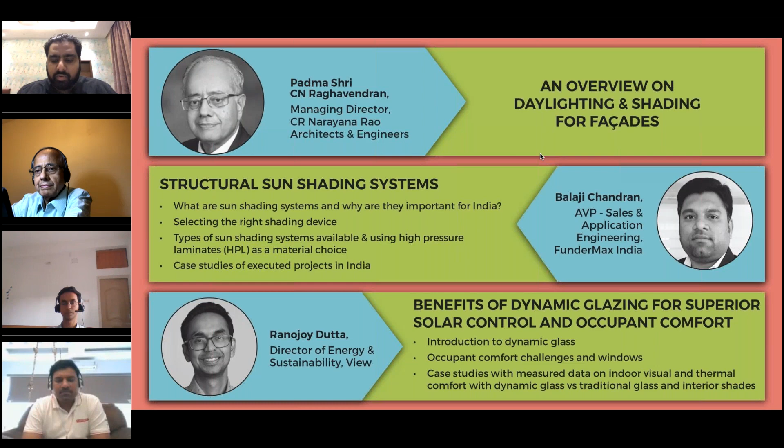Just to introduce our speakers, of course, architect C. N. Raghavendran needs no introduction, but I'll just run you through. He's a distinguished alumnus of IIT Kharagpur. He completed his architecture in 1966, and he also finished his master's degree from UC Berkeley in 1968. In 2011, he was awarded the Padma Shri by the President of India, which is one of the highest civilian honors a person can get, and we're very happy that a person from the field of architecture has won this. He has a lot of other achievements to his portfolio. They run into pages if I have to read them, but these are his broad achievements.

Next presenter is Balaji Chandran. He's the Associate Vice President at FunderMax. FunderMax is a leading manufacturer of high-pressure laminates. It's an Austrian company. So he's going to be talking about their structural sun shading systems. And then our last presenter for the day is Ranojoy Dutta. He is the Director of Energy and Sustainability at View. View is a disruptor based out of Silicon Valley in the United States. They are the manufacturer of electrochromic glass, which you can use to have dynamic glazing. So these are our presenters for today.

I will move on straight to the first presenter, which is architect C.N. Raghavendran. I will just give him the control. Just a second. So he will be presenting first. So, have you got the control? I've just given you the control.

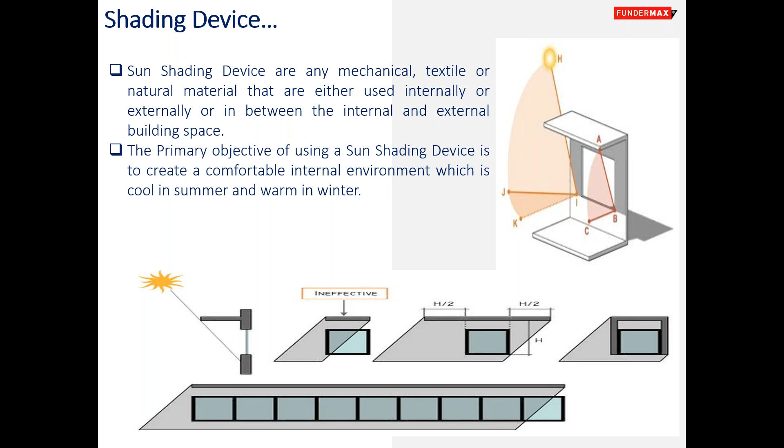Why is it so important in a country like India? I'll only take it in this context. India is not only a country which stands united in diversity, but also diverse in the various climates within its topography. As per the National Building Code, or even the Indian Green Building Council, the entire Indian topography has been split into 5 different zones.

Almost 75% of it falls under either hot and dry, warm and humid, or composite climatic zones, where the effect of solar radiation is much higher, which means the radiation in terms of light and energy from the natural source lasts for almost 6 to 9 months in these climatic zones. So this makes it clear that you need a proper shading element in a country like India, where light and heat are in abundance.

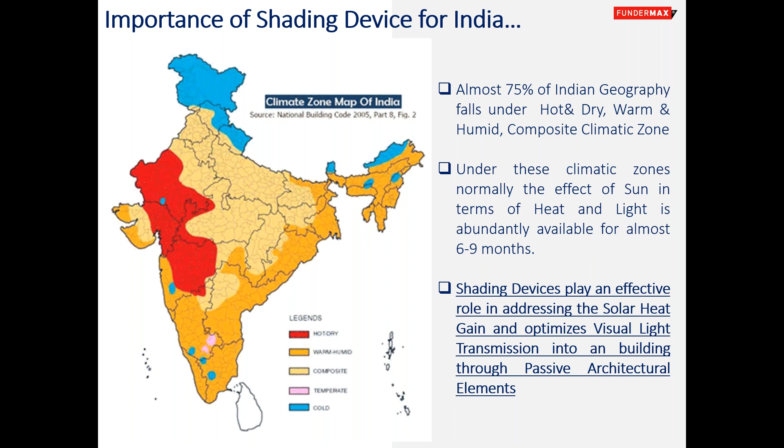Then comes the energy aspect, where I take some cues from the Indian Green Building Council. It's not the roads or highways, or the industries or factories, which are consuming more energy now. It's the commercial buildings. In the split of electricity usage within a commercial building, air conditioning or HVAC plays a vital role, absorbing almost around 57%. Almost around 22% is absorbed by artificial lighting. So these two factors make us feel that we need a proper shading element for our buildings.

And when it comes to heat gains through various elements in the building form, wall conduction and glazing conduction play a very vital role, as do internal gains in terms of light. The number of people occupying that space also adds to the internal heat gains. So these become vital when it comes to why we require an efficient shading element. When it comes to shading, there are 2 ways to shade.

There is a natural way to shade the building, and there is an artificial way as well. With the natural way, trees are the best absorbers, mitigating the heat island effect and keeping the microclimate at a reduced level. But urbanization gives us a very big challenge. Experts say that by 2050, almost around 65 to 70% of people will be living in cities. So this starts to define the usage of artificial shading elements.

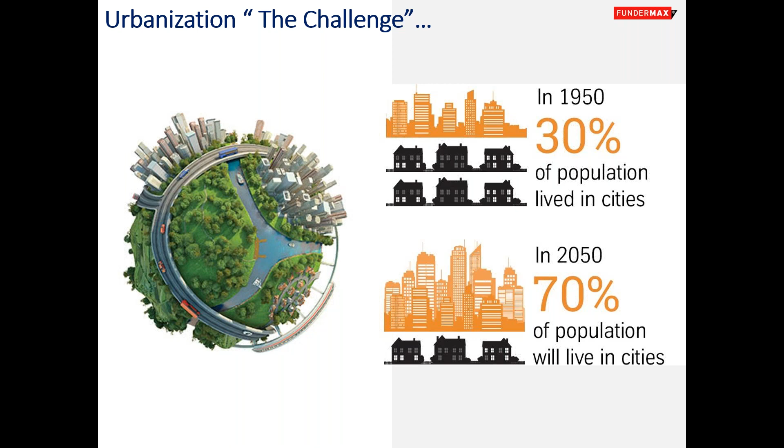So now, when we have this challenge in mind, what do we really do? We look at possible solutions on how we can curb this problem which we have in hand. When we look at solutions, the history of architecture itself gives us a proper solution, because India is a country where you have different forms of architecture clubbed in different spaces.

You call it Chettinad architecture, where you have large courtyard openings, which act as a light source into the building, and the cross ventilation itself takes care of the entire ventilation required for that structure. You talk about Keralite architecture, the thing which immediately comes to mind are the roofs, where the stack roof effect comes into play and ventilation happens through the stack roofs.

Similarly, even for the walls, our history gives us answers. In Keralite architecture, wooden louvers are predominant, slatted at a different angle so that they optimize the heat and light into the building. In Rajasthani architecture, or a little further northwest, jalis or perforated screens are widely used, which again optimize the light and heat into the building. These two forms are really effective, and these methodologies come under passive architecture.

Now we have a pandemic situation in hand, where the ASHRAE and ISHRAE standards might undergo changes with respect to HVAC systems, because the occupancy ranges will change. The recirculation of air could become very less, because in any good HVAC system a good amount of recirculated air gets into the system, which makes it more efficient than using more fresh air. But now we foresee that these things might change. We might require a lot of fresh air from outside rather than recirculated air.

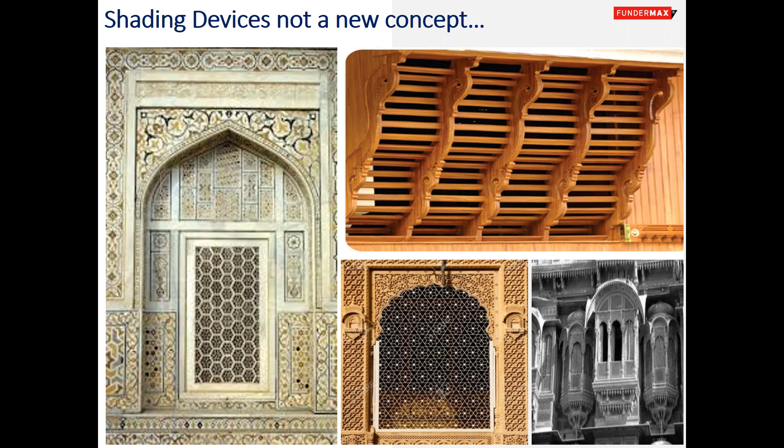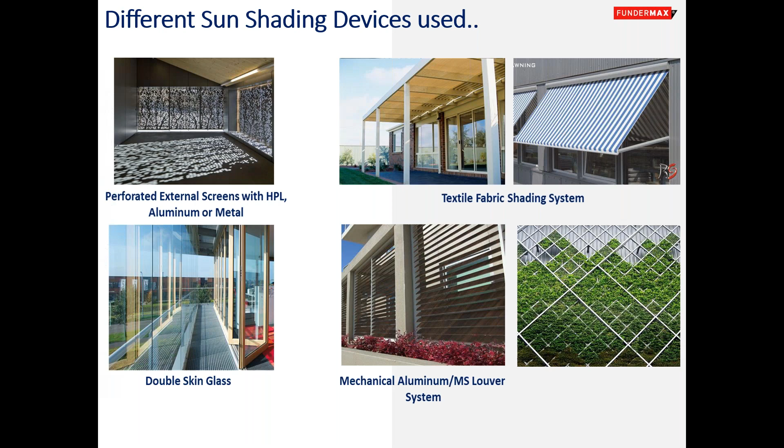So when it comes to how to select a good sun shading element, the first and foremost is the orientation of the facade. As I mentioned, India being in the northern hemisphere, the orientation of the building plays a very vital role. If I have to say which orientations will have more effect with respect to the sun's radiation, as per the bookish thing, it would be east, south, and west. North is left over, but this will also have its adverse effects in some of the southern cities.

Unless you do a proper sun shading analysis for that particular building, we might end up eliminating some portion of north where the sun would be even harsher. So it is better to do a proper sun path and shading analysis. There are softwares available for it. And the third important one is the daylight analysis. So these are the three things which are really required to select a proper shading system.

And when it comes to the material choices, the slat thickness plays an important role, whether the thickness is larger or lesser. The slat width plays a role. The center to center distance plays a role in terms of how much light or heat it is going to get into the building. The angle of inclination of the slats, because in different orientations, the angle of inclination could be different. And the most important one is the slat material itself.

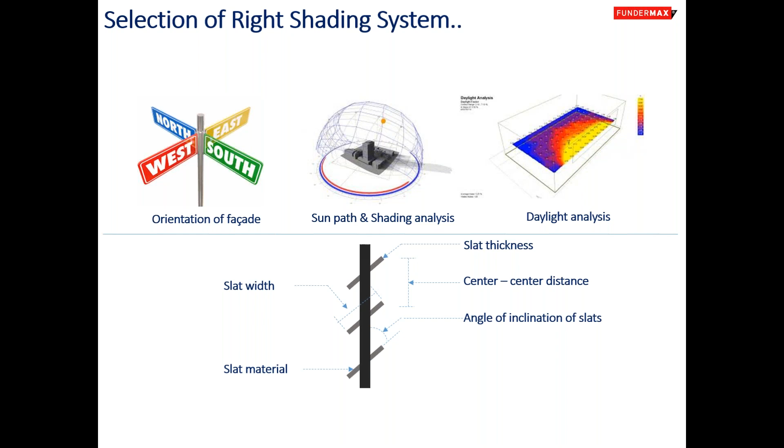So now comes the thing on how high pressure laminates can be a material choice. As I mentioned, yes, high pressure laminates can be a good material choice in this particular segment, because the thermal conductivity of the material is much lesser compared to any other conventional material used in the form of louvers or lattice screens. The maintenance is very much lower because, globally, high pressure laminates come with an anti-graffiti surface, so it doesn't allow dust to settle on the panel itself.

It is highly sustainable. Some of the manufacturers, for example FunderMax, have a certificate which says that this material is sustainable for 33 years without any change in terms of physical or aesthetical appearance. So that is highly sustainable. It is flame retardant, so it adds to the fire properties as well. It gives a high degree of design freedom for any designer. The choices of colors and surface finishes are multiple. It can be a matte finish, a glossy finish, even a textured finish in some of the colors. It can be wooden, it can be plain.

So coming to some of the projects where they have used high pressure laminates as a material choice and come out with stunning performances when it comes to the shading system. This is a recent project which was executed a year ago. The beauty of this particular project is it involved a movable sun shading system. It's not automatic, but it's a manually movable sun shading system which can move 180 degrees, either way. It's an educational institution in Ahmedabad where it was used in all 4 phases.

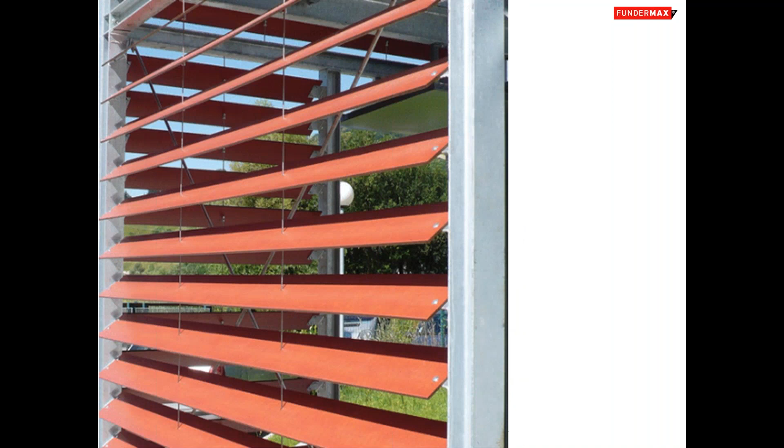Again, an angled louver system. A horizontal louver system which was executed in a project in Karnataka. This was a library building for the educational institution where they wanted to take out much of the heat and light. A government project designed by CRN Architects where we did a vertical shading system. It was a fin methodology where it was suspended at top and bottom.

Some of the international projects where they could combine well with horizontal and vertical applications. A different form of vertical louver itself, perforated vertical fins, horizontal fins, and then some openable and movable louver systems.

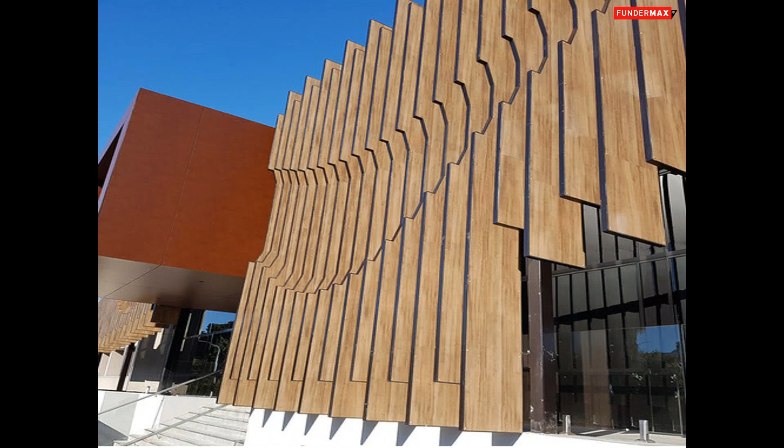Now coming to a case study. So we were now clear that yes, HPL is a good material. HPL is a sustainable material when it comes to this particular element. We did a small case study to understand how it will impact in terms of the capex, the opex, the discomfort hours, and what the ASHRAE standards would be. So we took a small model.

The city which was selected is Mumbai, because it's one of the harshest climatic cities. The climatic condition is warm and humid as per the Indian Green Building Council. We took a simple 10,000 square feet floor plate, which had a window to wall ratio of 60%. It had windows on all the faces. That's how we took the standard base case. The base case we considered was a clear glass DGU. We still went with the DGU so that it would be still better.

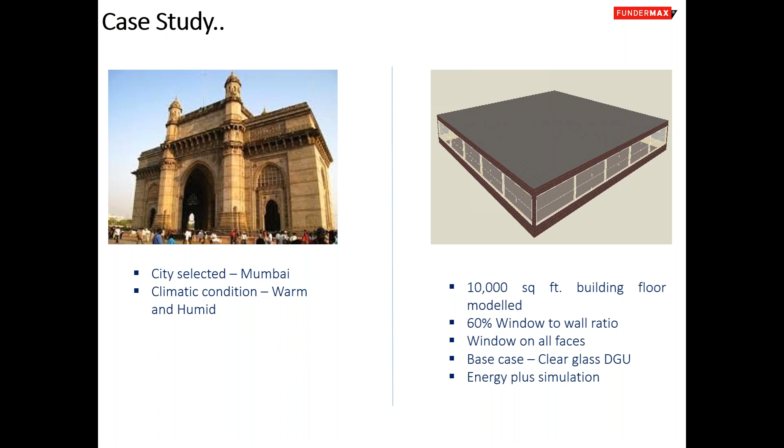So when it comes to the benefits, now we need to make it tangible in terms of certain values. When it comes to the benefit of a proper sun shading element, the first and foremost is the daylighting aspect. How a proper shading system or a louver system can mitigate glare is something we looked at. If you talk about a computer screen, it gives 200 lux. That's the amount of light which comes out from a computer screen. But when you talk about what is available near the window region,

I think we have some disturbance. Yes, I've sorted that out.

Okay. So in the majority of places, even at your homes, if you think about using a system, we normally sit near a window. There is a large amount of light coming from the window, and if you measure it, it will be anywhere in the range of 1 lakh to 1,10,000 lux. This is the amount of light which comes, and whenever you look at your screen, it creates a glare. A normal comfortable situation needs a glare contrast ratio of around 10:1, which means that if your computer screen is at 200 lux, the amount of light coming inside cannot be more than 2000 lux. So that gives the ratio of 10.

So if we have to optimize it, even with the best of the best glass, at times you might need a proper shading element which will also optimize the amount of light coming into the building. It can be optimized to a level of 1000 lux, which is possible through a proper shading element design, which also mitigates the glare.

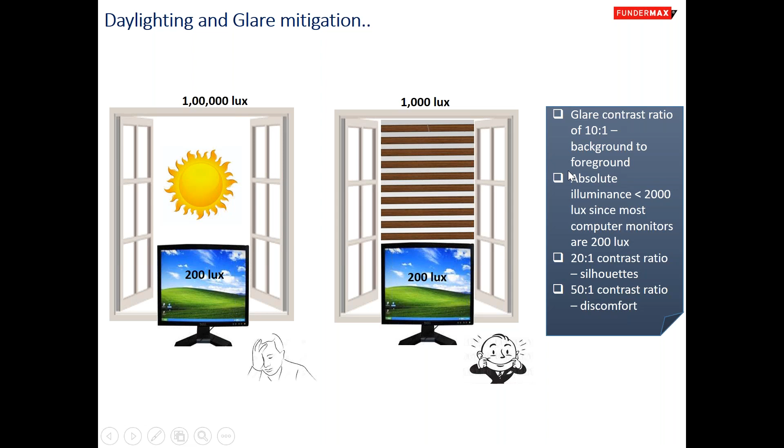Number 2 comes the usable daylight index. Normally when you talk about any commercial space, this is something which is really looked at: how much floor space can be used without any issue. In the base case situation with a double glazed clear glass, the UDI is only up to 70.4. But when you simulate the same with louvers or a proper high pressure laminate shading element, the UDI, the usable daylight index, crosses around 85%, which means you might not require a lot of artificial lighting for the floor plate to get into a proper workable condition. You can conserve a lot in terms of artificial lighting and use a lot of daylighting in your buildings.

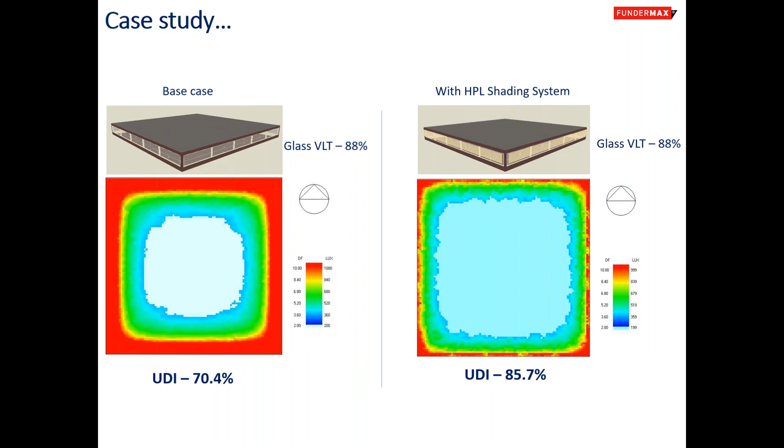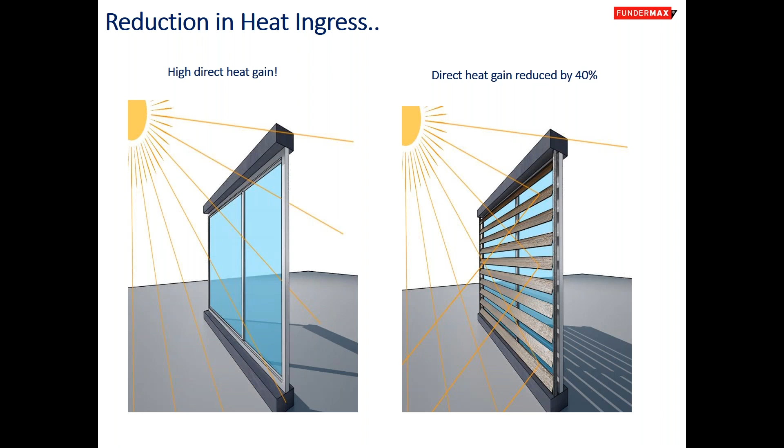Then comes the biggest benefit in terms of HVAC. We have considered the shading device as the only contributor to energy conservation in the building. When it comes to thermal comfort, by properly devising a shading system using software and sun path analysis, it is quite evident that we can curb around 40% of the direct heat gain which gets into the building and adds up to the HVAC load. So we did a small analysis to understand the impact in terms of capex and opex, because HVAC has both elements: capital expenditure and operational expenditure.

For the same floor plate, comparing a base case without louver, just a DGU clear glass, a good high performance glass without a louver, and a combination of a louver with clear glass DGU, the louver with clear glass DGU still performs much better. As you can see in the graph, the base case without louver gives around 96,673 watts into the building. But with a horizontal louver attached, the load drops to around 68,000, nearly 28,000 watts which you directly curb from the building when you effectively design a louver.

When you translate it in terms of tonnage, this gives a tonnage reduction of anywhere between 7.5 to 8. In monetary terms, the commercial tonnage is anywhere between 24 to 25,000 rupees. That's the base case. So a 10,000 square feet space can save around 2 lakh rupees in capex when we properly design a shading system. Now, if 10,000 square feet itself gives us this good earning, we do millions and millions of square feet of commercial building space.

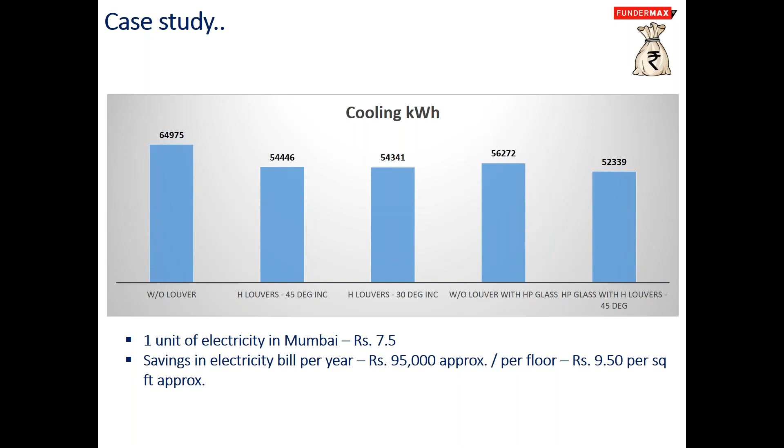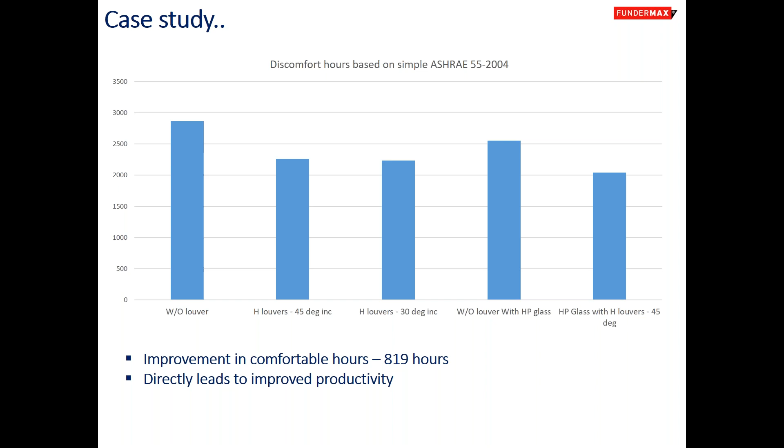So to summarize, when you talk about the benefits of designing a proper shading system with high pressure laminates, either it could be in the form of slatted louvers, or it could be in the form of a lattice screen. It gives its benefit in the form of daylighting, where the daylighting is much more optimized. The thermal comfort is much more optimized, where we saw it in the form of the capex and the opex gains in terms of monetary value.

It also adds to the green benefits, because the entire construction or the material itself is FSC certified. So it adds to the green construction even. And when the passive architectural methodology is also used, that also adds to the point when it comes to the Indian Green Building Council.

Just to summarize, yes, it's a complete green building system where it addresses the needs which are really required in terms of energy conservation. The carbon emissions are really going down, where the buildings are the major contributor as of now when it comes to the energy consumption. We can really conserve it by properly using these systems.

The water is being saved in a big way because the slat which is made of high pressure laminate itself is less in terms of maintenance because of the anti-graffiti surface. So you don't have to maintain it frequently. You don't have to lose water in terms of maintenance. It addresses all the three pillars when it comes to sustainability.

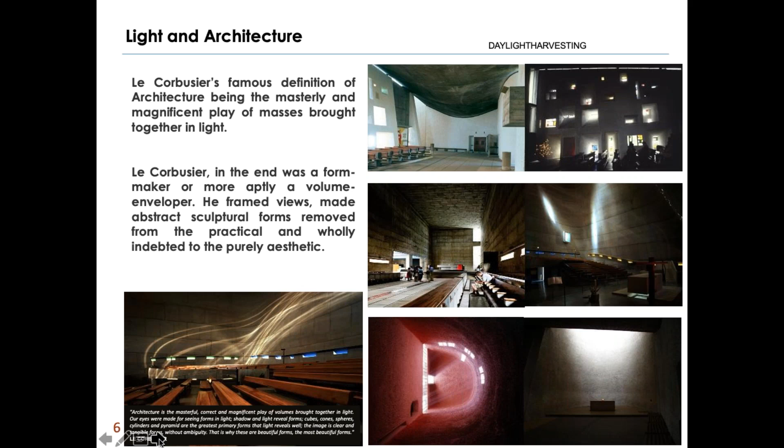Now in Indian examples, I can just cite two things that I have found quite good. The first four are the famous India Habitat Center at Delhi, designed by Joseph Allen Stein, a highly recognized architect. He worked in India, but was recognized globally. No matter whether you're inside an office or outside, within that courtyard, the courtyard is so well shaded, the offices get ample light, and the shaded area is so popular. People come out and sit in that area.

In fact, people come and sit outside, not only for social gatherings, but even work is brought outside. Because today you don't need to be tied up to a single place. You can walk out and do it. And this building continues to impress me, despite it being done about 30, 40 years back. It's a wonderful space; light creates this, and shade enhances it. This is the beauty of this place.

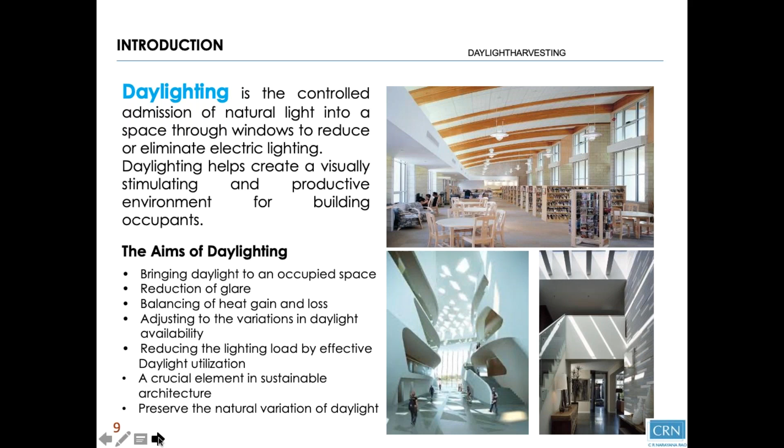So shade has got a tremendous character to it. Now, I just keep this because advantages of lighting is well known, and because of paucity of time; it also has been covered earlier, that light gives you a better environment to work inside, whether you work or live or whatever activity, human activity is made pleasant and healthy by means of light. Lack of light not only creates physical problems, but also creates psychological problems and physiological problems. Therefore, light is very important.

Now, there is a humongous amount of benefits coming out of light, and people found that a badly lit office space can actually create fatigue and also have an impact on the productivity of people and the wellness aspect of it. So this is again an example of how different people, different architects and different circumstances have creatively come up with solutions that take advantage very creatively of light to enhance the quality of the building inside.

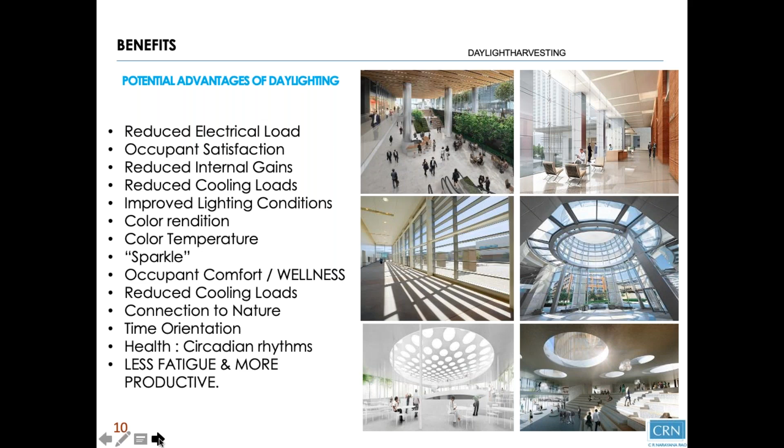Now, between roof light and side light, side light is easier to handle because it's already shaded most of the time, and except east and west, you have better chances of getting even lighting without much glare. So this again creates a tremendous atmosphere for people to work inside. Now, how do you make the light travel inside? Light, after all, comes through window and glazing of whatever form you have. The impact of that lighting is only up to maximum 10 meters. So beyond that, the lighting level drops down.

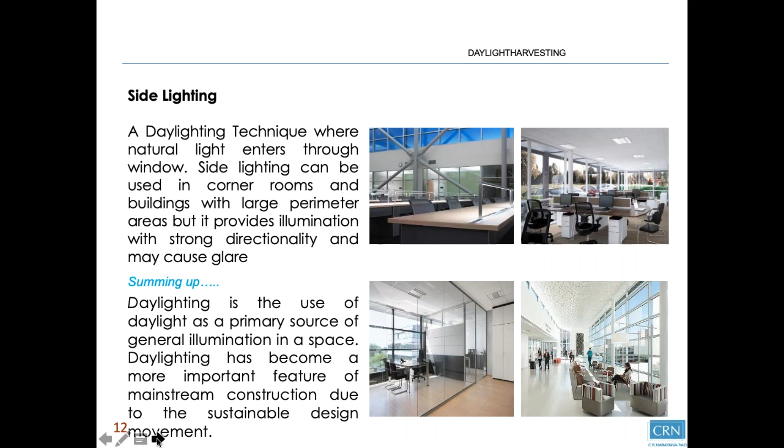Now, the whole idea of depending on daylighting inside is that you reduce use of electric lighting and you save energy, and you contribute in a tremendous way. You save energy, but it has a chain reaction going all the way up to production. Therefore, this is environmentally an excellent strategy, but also in terms of initial cost, operation cost, etc., which was also previously mentioned. Now, to make that travel far inside, you have a system what is called light shelf.

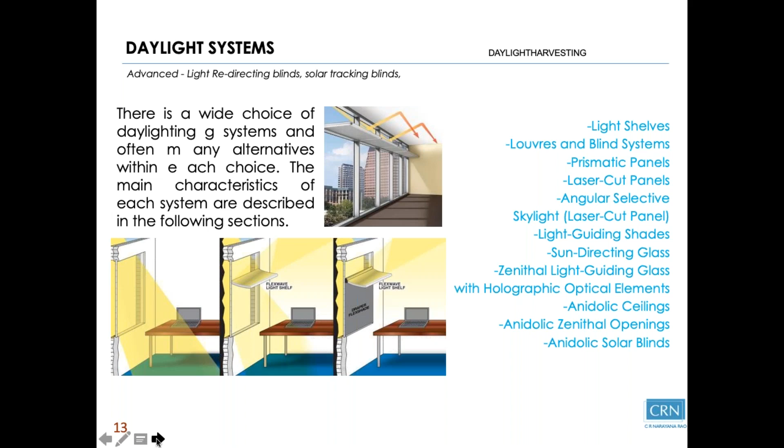Now, light shelf, you see on the left a window with no shade and light coming in through this. This light could be quite harsh if the sun direction is wrong, if the window is in the wrong location. But by providing a light shelf, it not only provides the shade, but the light falling on that light shelf gets reflected and travels up to the ceiling, and again gets reflected, and then the daylight penetration increases from about 5 to 6 meters or 7 meters, almost up to about 10 to 12 meters. And this is a very practical possibility that has been used successfully both in India and abroad.

There are different kinds of louvres and light shelves, and also louvres and blind systems. I will not go too much into this for paucity of time. But you also have panels where, by the way the glass panel is made, the sunlight is refracted. The sunlight coming at an angle should normally have come down and hit the ground. But because it gets reflected, it becomes almost horizontal. Therefore, it travels far into the innards of office spaces, and you get a more even and pleasant lighting. You don't have dark spots, spots that people avoid because of being dark.

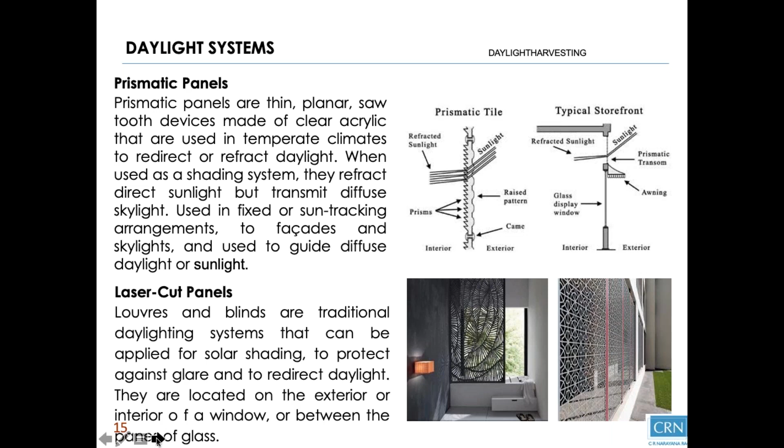Same thing with glare, for instance. Excessive glare can be taken care of by these fine laser cut panels, which already has been mentioned earlier. The other way of bringing light is through solar tubes, which actually capture daylight right on the roof through a prismatic kind of arrangement, and through a polished set of tubes, it brings in and can light spaces that are away from windows, or even spaces that have no windows at all, like basements. These tubes work very satisfactorily, and even areas which have no windows, no external surfaces outside, can be lit through this.

For instance, you get almost working condition inside a factory, totally dependent on solar. This is in fact an advanced system which we tried to incorporate in one of our projects for Infosys, a combination of this solar light panel which comes in.

It's integrated with actual electric lighting, which has a sensor. So the sensor automatically brings in daylight in daytime, and when the sensor recognizes a dip in daylighting lux levels, it automatically switches on the electric light. The idea is that one doesn't have to go out and switch it on.

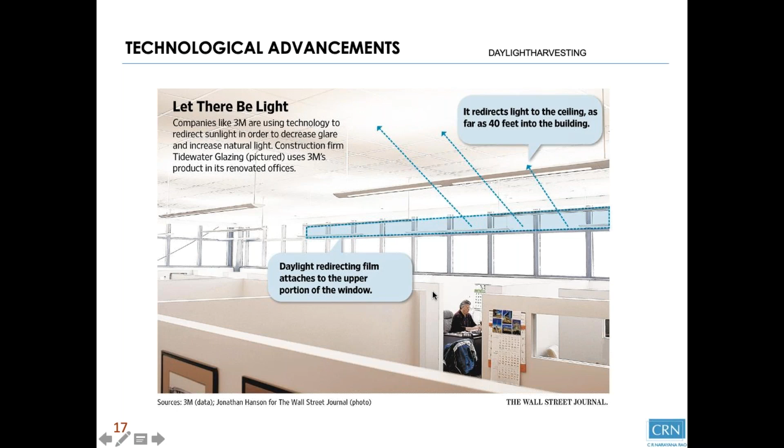It's not timed as such, but it is reactive to the external conditions, the overcast sky, cloudy sky. So these things transition automatically. So that's the idea of this kind of protection. We can see the daylight here. We can see these bright spots on the ceiling, which bring in light, and it also provides shade for the immediate adjacent area to the window on the external side.

Now, the applications are across residential, institutions, industrial, hospitals, recreation and commercial, and also in large scale projects like airports. For instance, Changi Airport has got beautiful ceiling-suspended vertical elements, partly vertical, partly inclined, and partly reflective. And that creates a wonderful internal atmosphere, which is almost uniform in lighting levels. In spite of so much direct radiation coming into the building, this set of louver arrangements, this set of ceiling arrangements, dissipates heat and allows ambient lighting to come in, makes the interior very pleasant, and also creates a very good ambience inside.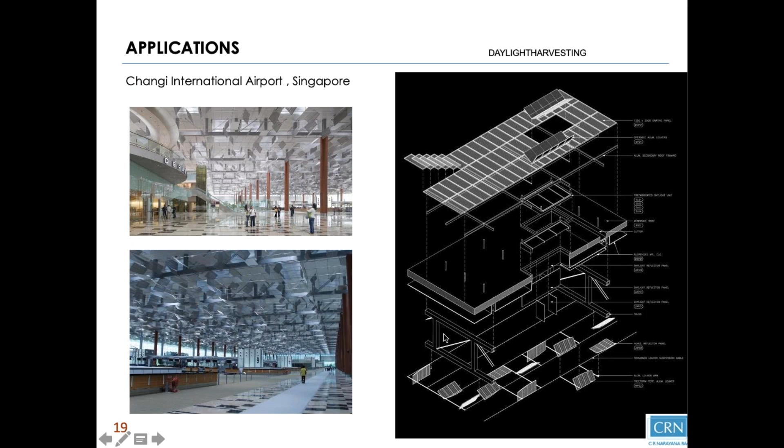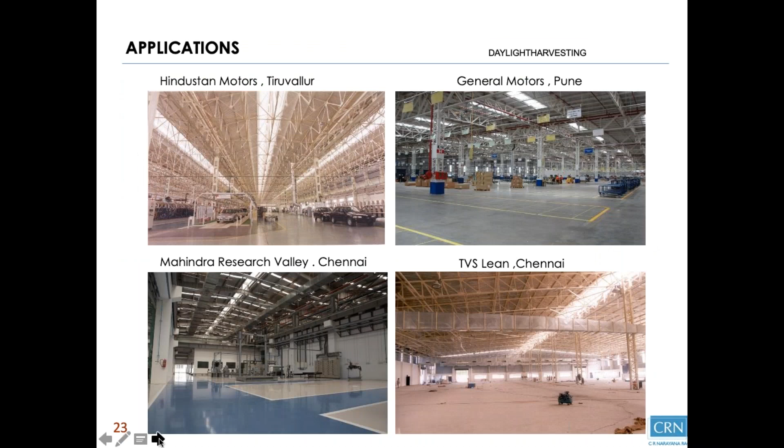Now, all this is done through simulation. There are several software available. It checks the external conditions. It also checks the atrium concept. So now we have several buildings, particularly commercial and office buildings, with a huge atrium, and also residential apartments with a huge atrium, intended to bring in daylight and fresh air. For daylight, there's a program with which you can check, supposing it's a 15-story or a 24-story building, what is the effective size for the atrium to be effective. And sometimes you have to step back one side of it to make the lighting levels even.

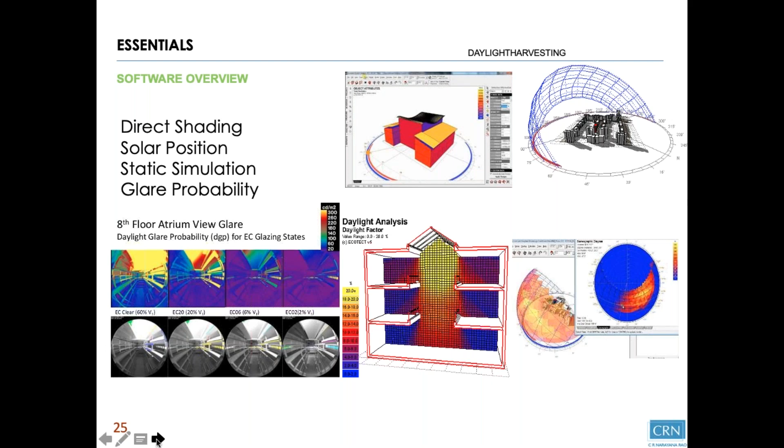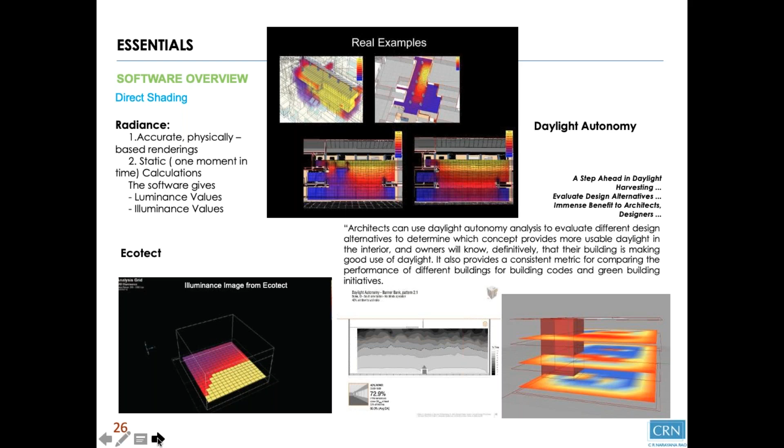And of course, for ventilation, it's possible, but it's a completely different set of software I will not touch upon. It's a CFD kind of thing. And smoke control also happens through CFD. Now, I'll skip all the various kinds of software with which you can check the illuminance level. In fact, Ecotect is a very versatile software, which checks not only the lighting part of it, but also the overall indoor condition.

I'll skip all this and go to certain examples I have, which are creative, adaptive, expressive trends for the future. Now, this is not necessarily in India, but it will be soon. Sorry, just.

Now, I'll just look at some dynamic facades. Of course, there's going to be a subject on dynamic facades coming in later, and these are live examples of how dynamic facades work. They adjust the light and temperature in the room by controlling. It's all by self-control, user control. The user can control and maintain the levels of lighting and levels of temperature to suit his position in the floor plate and manage the comfort levels.

And then you have light control dynamic facade. Now the dynamic facade again, this is again a very famous building in Abu Dhabi, the Investment Council headquarters, which has a filigree kind of an effect. It's actually reflective of the heritage culture of some of the buildings that were existing in that desert country several centuries ago.

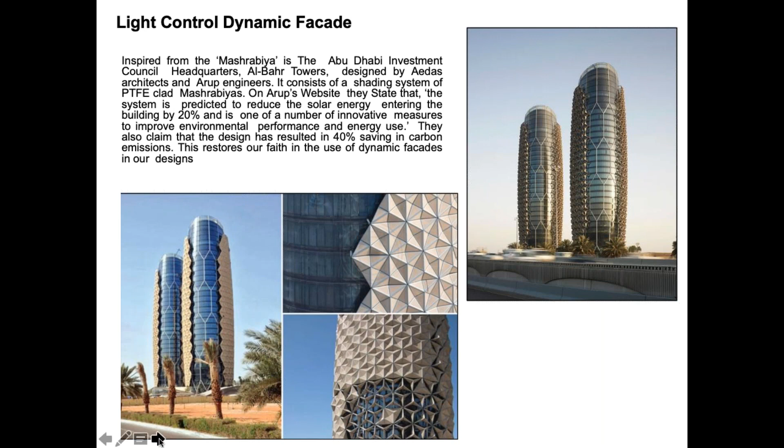So adaptively, the architect has created a facade which not only symbolizes or connects up with the tradition and heritage, but also creates a kind of dynamic facade which keeps the inside more efficient in terms of lighting and power, but also enhances the quality of life itself. Now, these are wind responsive dynamic facades.

Now, here again, you have a dynamic pattern of motion, and this again being used in Brisbane domestic terminal car parking, where you have these small prisms, small plates hanging, very intricately designed, and it's a very simple mechanism, but it's mounted in such a manner that the wind can disturb the pattern, and it not only provides shade inside, but also creates externally a constantly dynamic facade depending on wind movements.

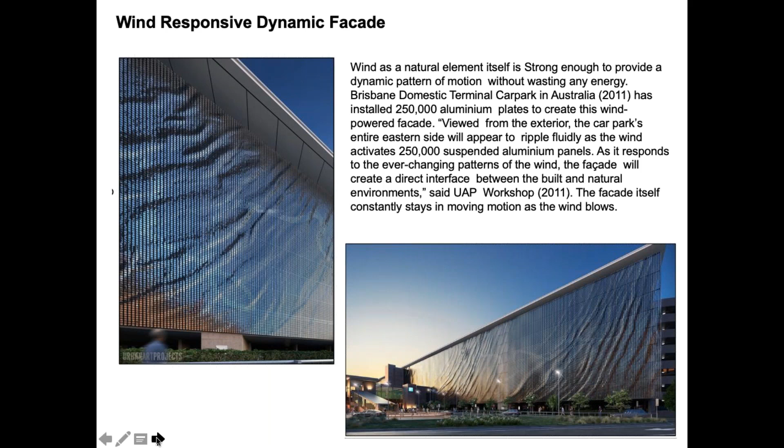I mean, imagine a building almost coming to life if there's a wind. This is a phenomenal example of how architecture can come fully with life. And there are different forms of geometries that are adopted to provide shade, to provide lighting, both vision and spandrel panels, they're all taken care of, so that you not only create a very balanced and dynamic kind of a situation for the inside conditions, but also externally, the building presents itself as an expression of the intent of the architect.

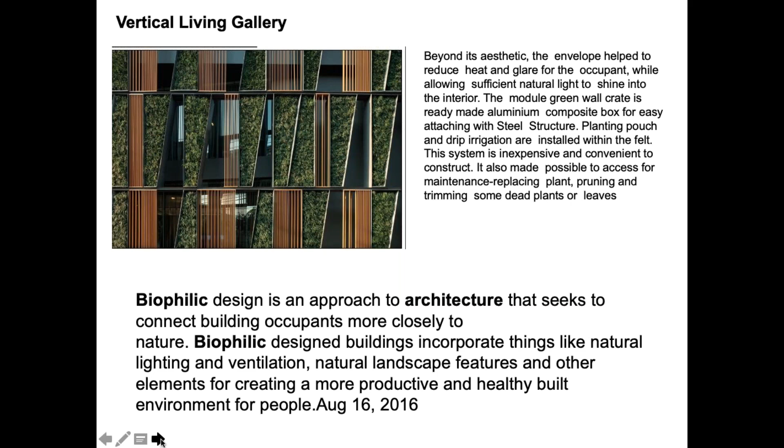You have, of course, vertical living galleries. This is, of course, becoming extremely popular. In fact, certain countries, for instance, Singapore has by mandate stipulated these green facades, like a biophilic kind of design, that is, bring nature close to the place of living. And how do you do it in a tall building where you're completely cut off from nature? So that practice is also being followed. And it's going to be a trend which is liked by people who live in the building.

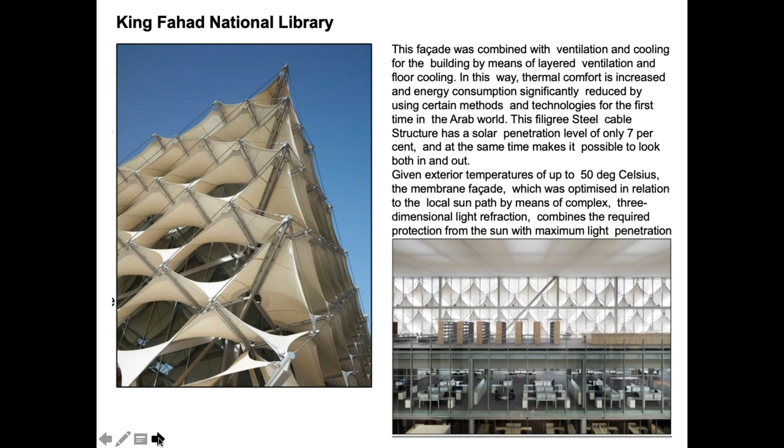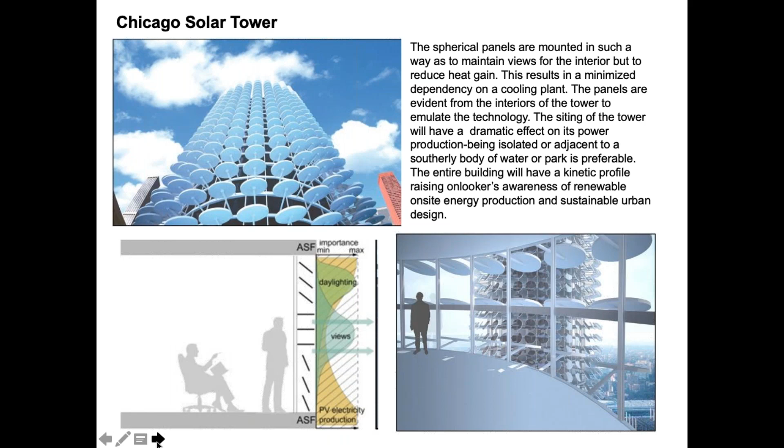And there's another very interesting building in Chicago, which has got reflective solar arrays. The solar arrays are responsive to sun path, and based on sun path, they keep changing the direction, not only for generating power, but also for shading the insides, and also afford view outside. Because view outside has been recognized as a relief feature for people who live inside buildings. And if you don't have an external view within a specific distance, many of these rating systems, both Indian and abroad, look down on it.

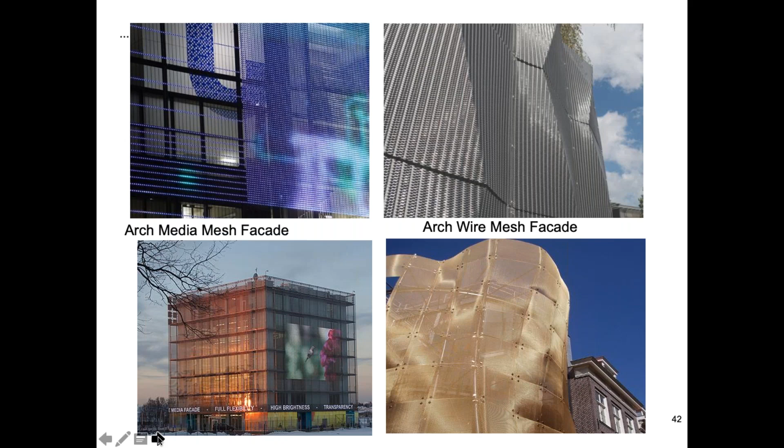Now, these are again movable detached kind of louvers, which has already been mentioned. I'll skip this, and then we have media facades. Now, these media facades are interesting because in daytime it gives you shade, it gives you glare freeness, but whenever you need, you can actually convert it into media, as a dynamic visible element. You can reflect many things that the owner of the building wants to project. Then material-wise, new technology and new materials have come across, like this polycarbonate sheet.

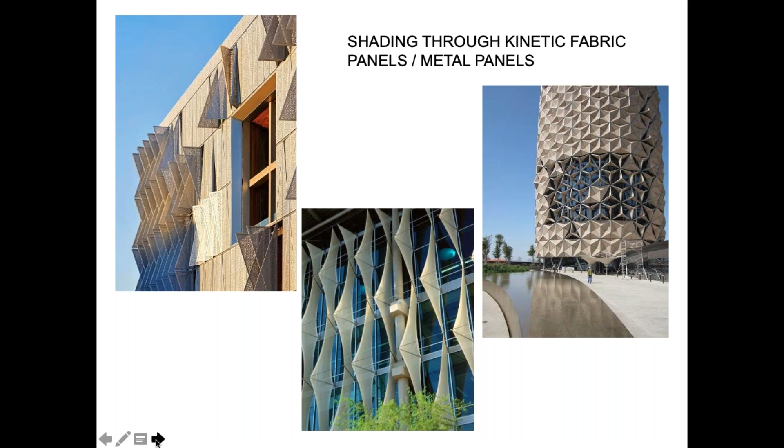But my personal view is that many of these materials need to be not copied simply because it is a success elsewhere. We need to really look at the Indian conditions for this. Now, this again is fabric through a cable stay structure, which is dynamic, which is related to the solar movement. So depending on the solar movement, the sails swing across. You get daylight, you get less glare and less heat.

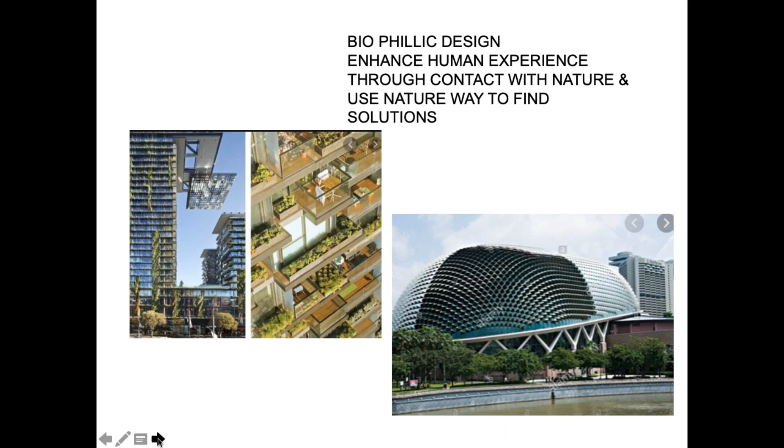Now, these are through building elements itself. Building elements itself forms the shading and protection. Then you have all this biophilic design that I mentioned a little earlier of offices and housing and commercial buildings having a living garden within reach. What a relief it will be for a person who works in that building.

It's a very mechanical and simple way of doing it, because you have a sophisticated computer system doing it. But it's to explain it to a project owner who wants to know from basics. This kind of study helps them to reach out.

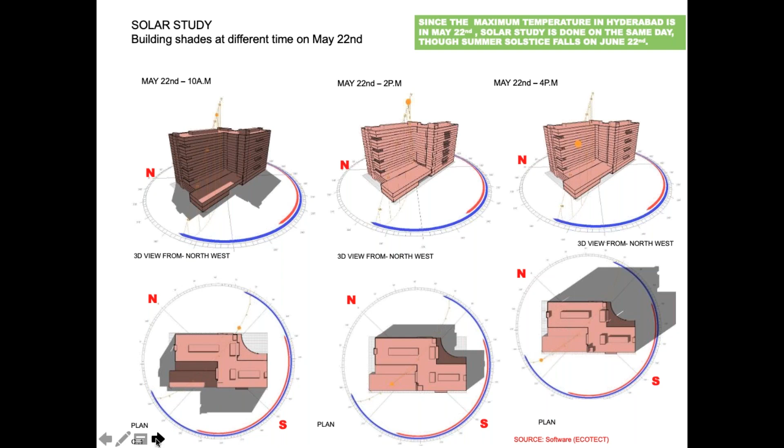Now, this is a building that we did for Amazon at Hyderabad. It's a very large office space. Here again, the orientation, the massing, and the building was done in such a way that, as you can see in the left bottom corner, one part of the building shades the other part of the building. So that way your glass becomes more efficient, your power becomes more efficient.

And the selection of shading also was tested both for daylight enhancement and also for preventing solar ingress. These were done for different situations, different floor plans, to see how much impingement impacts the inside conditions. Then you have a program which studies this whole pattern to see how much of the lighting levels you can get on daylight.

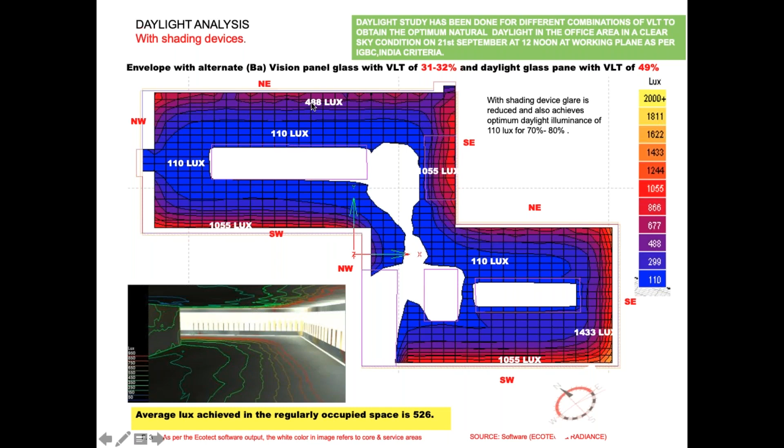So it varies from more than almost about 500 lux to 110 lux. So the shading device doesn't stop lighting completely, but it allows a good enough quantity of light to come in and reduces the area which is more intense in terms of heat and so on. These are some of the pictures that we made at this stage.

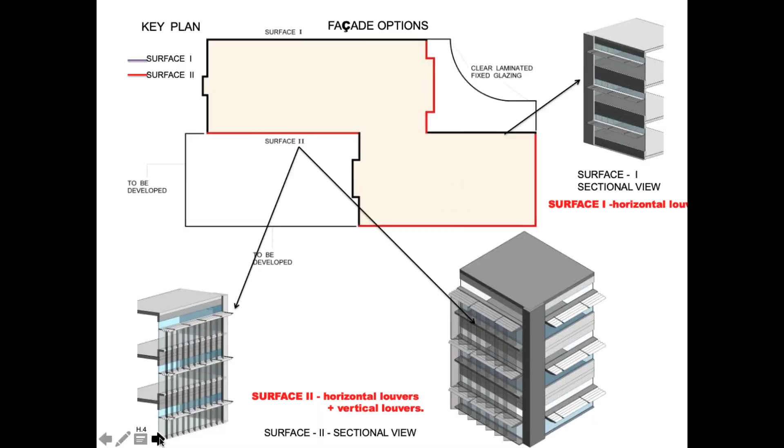And there's another building that we did at Bangalore. This is for a government health services department building. Here again, extensive solar studies were made, and there's a huge courtyard inside, which brought light to both sides of the office. And I mentioned a little earlier the study of light penetration through a vertical atrium; that is also tested here to see how effective it was.

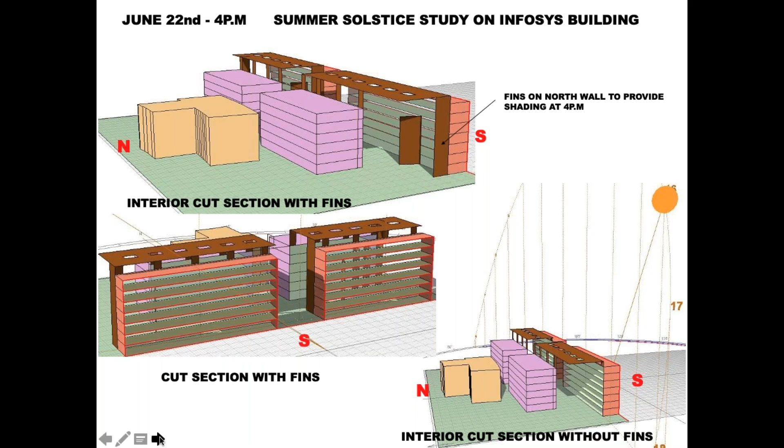This is the Infosys case that I mentioned. This is the building, how the sustainability solutions were physically tested through a computer program. And these are various software solutions which actually bring out graphically what we are trying to assess and what we feel is an advantage to us.

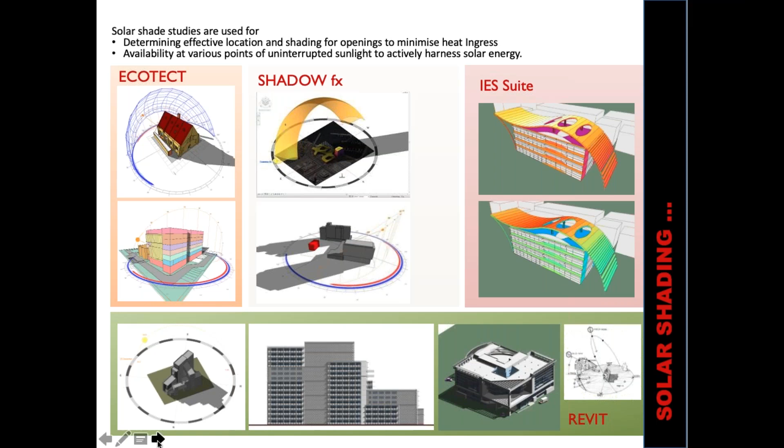So all this kind of software is becoming all the more important, so that an architect not only has creativity in his mind, but is able to use technology tools to evaluate buildings that he's designing. It's no longer good enough to say that my building is very good; you'll have to prove it and measure it. So this willingness to measure, to be evaluated, not necessarily by an external agency but by his own self, is really an honest attempt on the part of an architect to do what is right.

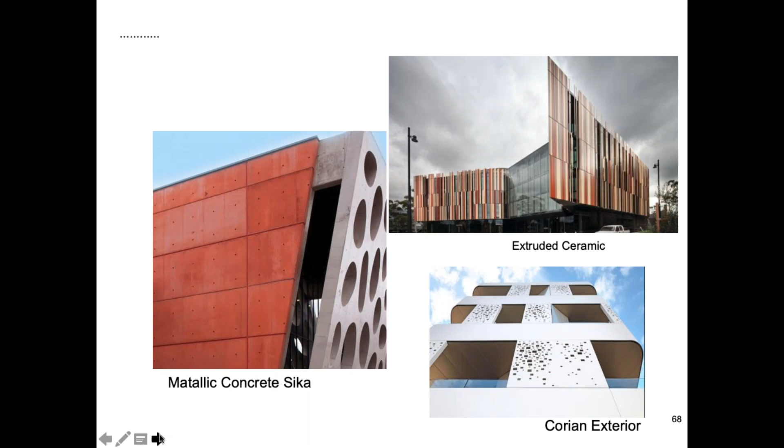And these are again building elements, like concrete itself can become extruded or perforated, and also Corian is another synthetic material, resin based, which also can be used because it maintains itself.

Then there are rain screens, terracotta rain screens, and so on. Now, I just want to touch upon some of the new technologies and innovations that are happening in this field, particularly in the area of glass technology. You have the electrochromic glass.

Now this is again a study of another new product which is being tested currently, and of course it's also been used. It's a panelite material. It's got an internal honeycombing panel, which allows a high degree of light transmission, but at the same time outperforms even the electrochromic glass in terms of shading coefficient and in terms of the solar control light transmission. So these are all new directions and materials that, if not this generation, the next generation architects can follow. This exactly shows how the reflective solar heat reduces energy consumption, but at the same time distributes light evenly and works very efficiently.

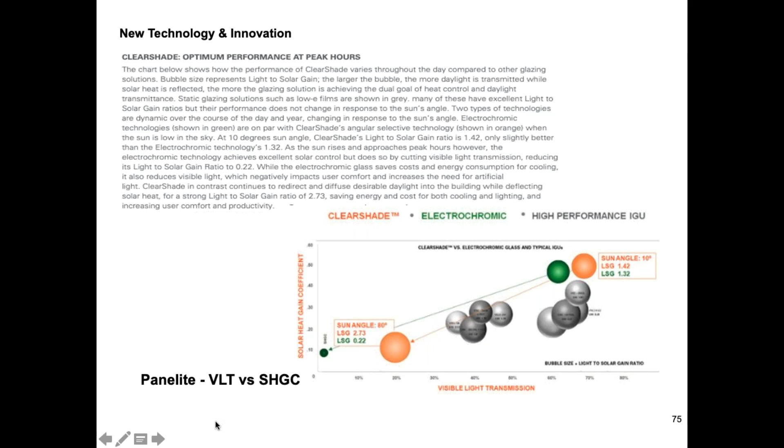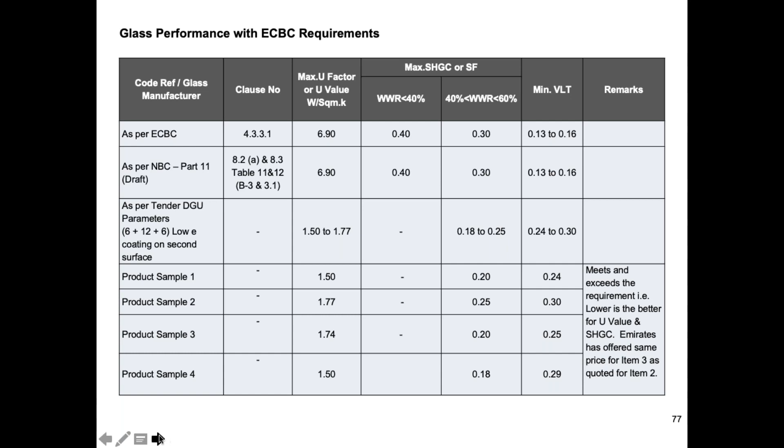And there are regulations, both ECBC and National Building Code today specify the insulation value of an exterior, not only for vision panels, but also for opaque panels. Even plain walls need to be insulated. And therefore, the whole idea is to insulate a building. It's a one-time cost, but the recurring saving that you get out of this insulation is phenomenal.

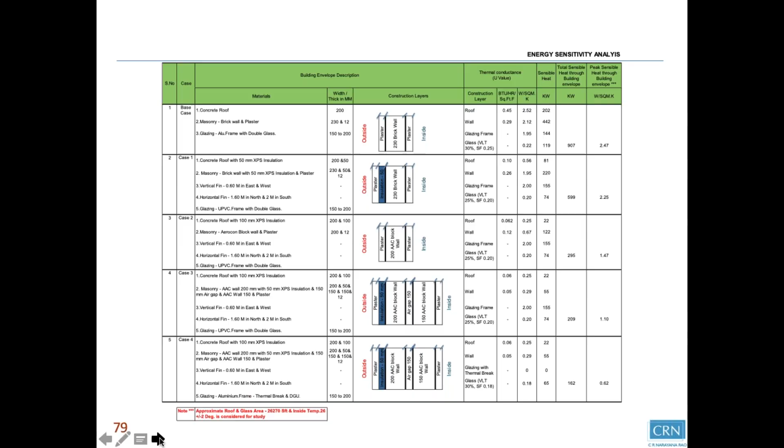Now we've done a study in which doing nothing gives you a certain value, the top row, and doing reasonably everything drops it down to 0.62 units. This is a tremendous drop, and how this can be achieved by passive design of buildings is a permanent example. So I think I'll come to the end of my presentation. It was a very deep topic. I didn't try to do very highly technical stuff, but I wanted to explore and make people look at what is possible.

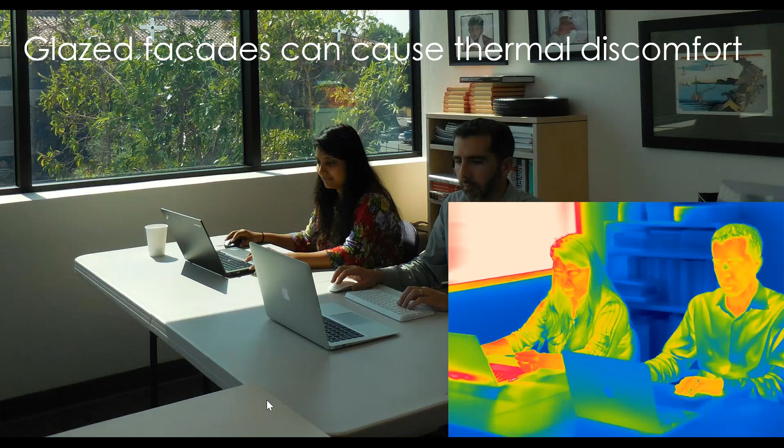And to avoid glare, you might think, okay, I'll turn around and not face the window. Then you'll end up with thermal discomfort, because thermal is even less forgiving, right? With glare, you might turn your computer around, look in some other direction, and get away with it. But as long as you are in the sun, as far as thermal is concerned, you're going to have a pretty bad experience. And you can see that an infrared camera will capture those surface temperature differences. I'll give some examples of this down the line.

So what happens is that despite all the good intentions of the architect and the requirements from the owner, all this glass is getting added to these buildings, and this is the outcome of the lack of solar control through glass, essentially. Neither is this aesthetically desirable, nor do you have outdoor views, and there is reduced daylight. So essentially, what's the point of even having all these glass windows?

So clearly it is important to question the status quo of designing with glass. I think the time has come, and what we need is not an incremental solution. It has to be a transformative solution, almost a disruptive solution, so to say. Because glass has been used for hundreds of years, it's time to really look at something completely different. The key point to understand is everything around a building is dynamic, right?

The weather is changing on a day-to-day basis, hourly basis, even on a minute basis. So how is it that a static facade is going to keep up with something that is constantly dynamic, right? Something to think about. So that's a fundamental question to think about. So if these constraints are taken away, if you can design with glass but you don't have that discomfort, thermal or visual, what can spaces look like?

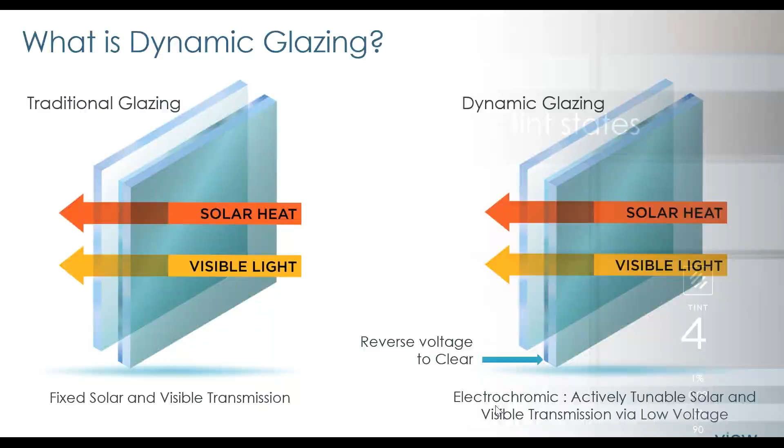And then when the voltage is reversed, it goes back to clear. So that's at a very high level what electrochromic technology is. So here we are coming back to the View Smart Glass, which is electrochromic.

So our product has 4 tint states out of the box. This is not 4 windows. This is one window for 4 tint states. The clearest state has a TVIS of 50%, SHGC of 0.38, right, and goes all the way down to 1% TVIS and 0.09 SHGC.

So this range is almost impossible to find, especially the lower ranges. You are not going to find it in a static glass product, unless you want to be in a dark space all the time throughout the year, right? That's not how you would like to design. The beauty of this is that you have a range where the product can do different things at different times, right? Depending on the season, depending on the time of the day, and it's going to maximize the availability of daylight and/or control glare and thermal discomfort.

The point to note is there is never any obstruction of outdoor views. Even in the darkest tint state, you're able to clearly see outside. So I want to make it very clear that there is no clouding in the glass, there is no haziness in the glass, none of that happens. It's always crystal clear, even in the darkest tint state.

So this is sort of our product. These are the 4 default tint states. I will add that tint states 2 and 3 can be changed a little bit based on customer preference, but usually our 1 and 4 are kind of fixed, the extremes. And we can do different combinations. You can have an additional low E if you want a better U value and whatnot. So that was the coatings part.

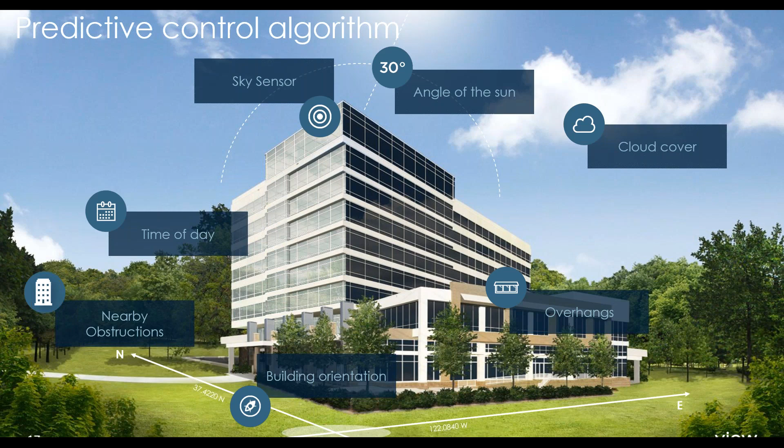So in a nutshell, these two in tandem: we have this predictive model which is kind of the autopilot, and then we have the sky sensor which is tracking the weather, which is kind of like the pilot. So these two together are flying this ship, so to say. And again, this is a very high level explanation of this technical program, but I'll tell you this much: we are looking at very sophisticated machine learning algorithms to improve the prediction of weather. It's a very difficult challenge, but we are already putting resources on figuring out the best way to control this glass, because the aim is to always optimize for daylight. Whenever it doesn't need to be tinted, we don't want it to be tinted. We want it to be clear to allow for daylight. So that's in a nutshell the 3 parts of the product: the coating, the network, and the software.

Again, this is a very, very customizable product. Depending on what the customer wants, where the furniture is, whatever their preferences are in terms of the tint state, anything can be done. And the beauty is because it's software controlled, we can do this completely remotely. We don't even have to send anybody over to these buildings. It can be completely done remotely through the network, right? So that was a quick vision of what the product looks like.

So now I want to talk about some comfort case studies that we have done where we have compared our product with traditional glass with internal shades, because that's the most common. I know that CNR sir showed a lot of really good examples, which are a little bit less common, I think, for several reasons, but we went with the typical shading, that is the internal shades, for now. So here is the first case study. This is a warehouse that was turned into an office in Bentonville, Arkansas. This study was done on February 27, 28.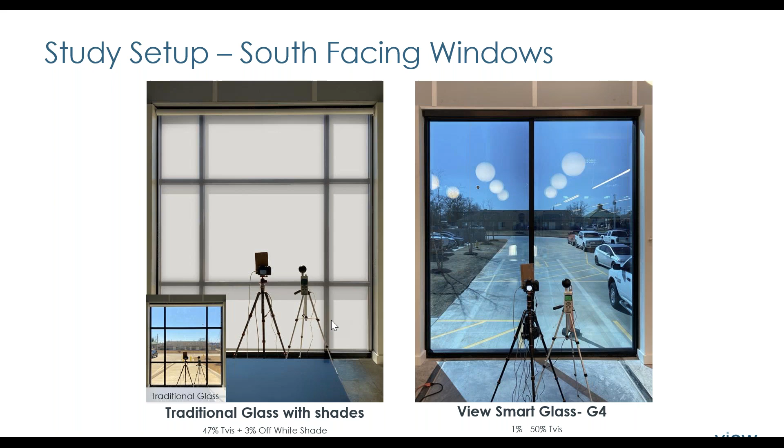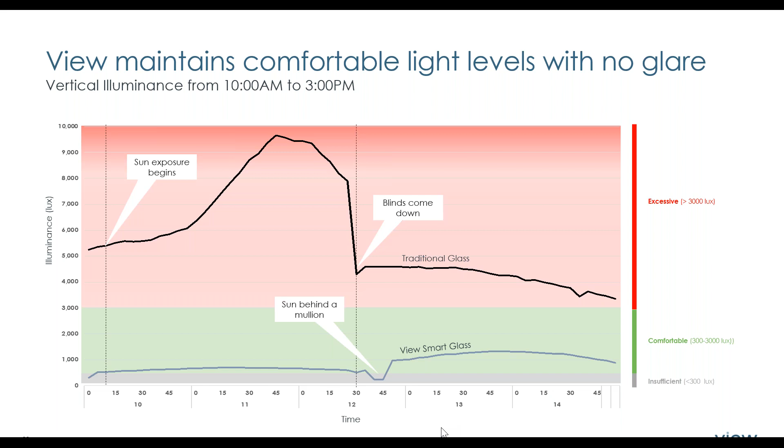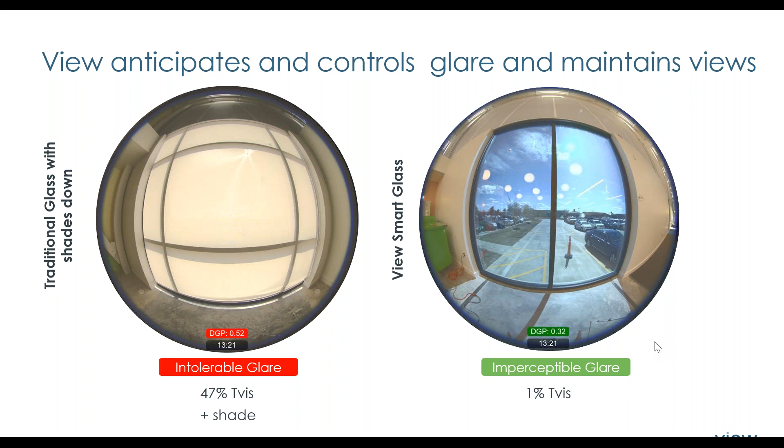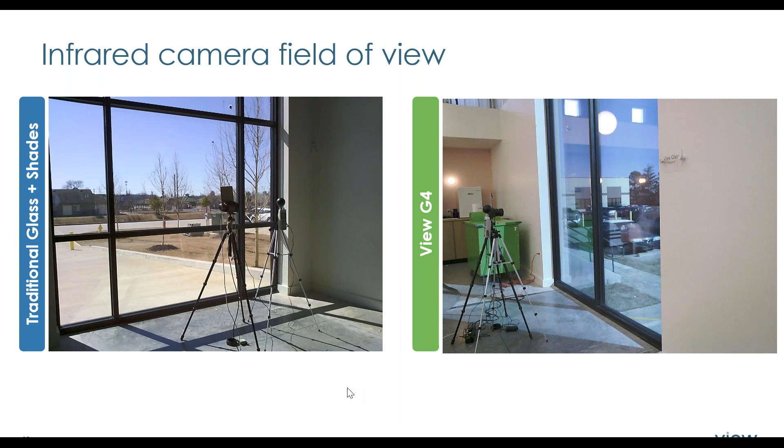And like I said, it's important to understand the thermal along with the visual in my mind. So I want to kind of show you that as well. So we took infrared camera pictures of these two windows, and these are the view angles that we took for the two windows. The idea was to get at least some of the floor surface, because here we didn't have any furniture next to the window, so we wanted to capture some of the surfaces to see how much heat these surfaces are receiving, how much hotter they are getting, because this is a very direct indicator of whether there will be discomfort or whether there will be a cooling load, right? I mean, we all understand that this heat is coming in, it has to go somewhere.

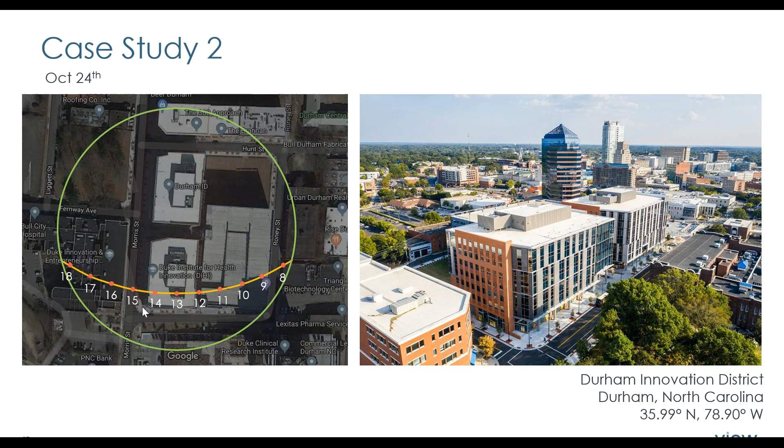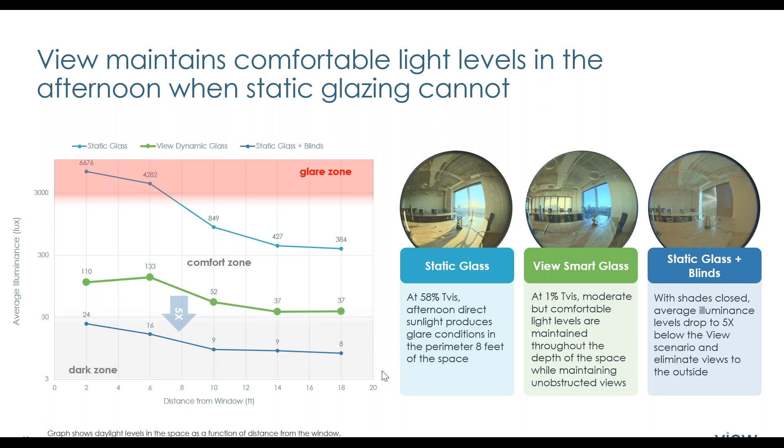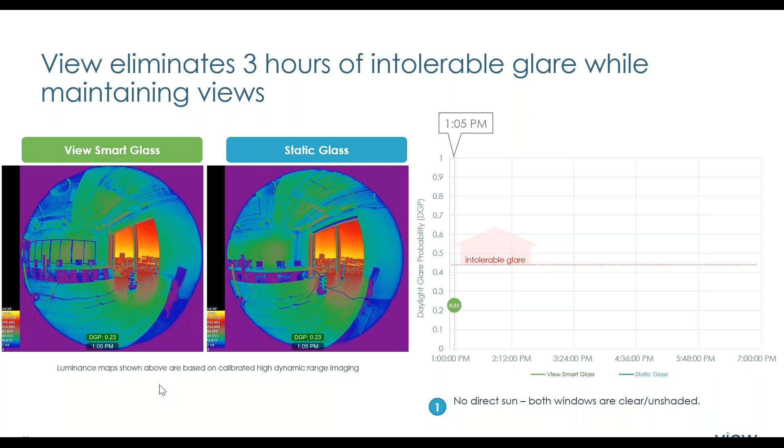So just to be clear, this is again an energy implication. These are all kind of interconnected. It's very hard to separate one from the other. Quickly, similarly here, the glare: what you see here are what are called luminance maps. This is also taken from the HDR camera. This is essentially showing you the brightness at the source as opposed to the light reaching a surface. This is the reverse.

This is how bright the scene is, right? There are also certain thresholds for it, so we track them side by side. At the start there was not much difference, but I'll just speed up a little bit. As you can see now, the sun has started coming in, right?

This is the unshaded glass scenario. This is the View glass, where it's already tinted. So clearly it's already hit the glare point, and after that it's intolerable. From about 3:30 all the way to 5, it's just impossible. There's no way you can sit.

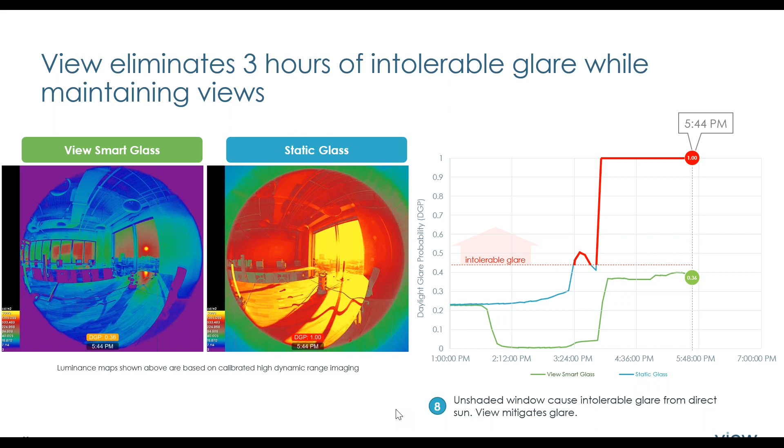So you'll have to pull the shades down, and you already know what the answer to that is, right? You'll have no views, you'll have no daylight. So that's a huge compromise. So this is what we found from the study.

And then finally, thermally, similar kinds of results. You can see this is the view angle from the IR camera. The nice thing here is we actually had the workstation, so we could see the workstation surfaces. Let me speed this up a little bit. This is the traditional window with the shades down, 1% shades, and this is the View window in a tinted state. What you're going to see in the graph is the progression of the surface temperatures.

Let me just speed up a little bit here. The black dot is showing you the work surface temperature, and the red dot is showing you the shade surface temperature. What we see is that around 4:45, the shade has already hit almost 38, 39 degrees centigrade. This shade has become such a hot radiator, right? And the work surface is also close to 30 degrees. This is in a room where the set point is only 23.

So the HVAC is running at absolutely 100% capacity, but it's not able to deal with this heat. So where is this heat going? It's all going into the HVAC, which has to cool the space, right? So significant energy consumption, not to mention the thermal discomfort for people sitting here. In the View scenario, we see that the rise in surface temperature is very, very little, and it's well within the set point compared to the other one.

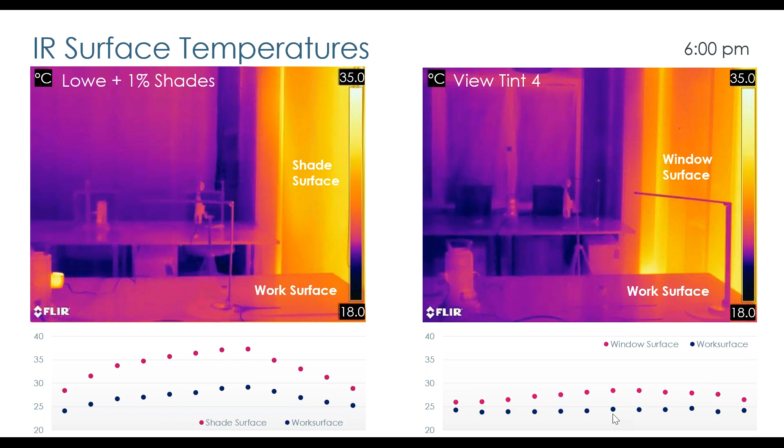So the point again is that with dynamic glass, you're able to maintain consistent indoor conditions, which I think Sienna Rao sir also touched on. It's important to maintain that consistency, but you're never losing views outside, not even for a minute, no matter what tint state the glass is in. That connection to outdoors, which is very critical for productivity, for mood, for reducing eye strain, is always present with this product.

With that, I'm down to my last few slides on project profiles of how this glass has been used. I know you might be curious where this has been used in India, so I want to start with that. This is our first project in India, the Divi's Lab building in Hyderabad. Like I said, this was our first install. It is up and running, and it's a slightly older generation of our product, but it's something we can refer to.

More recently, we are working on a very large building in Electronic City in Bangalore that Velankani Group is building. It's about 175,000 square feet of glass, one of the largest installs in the world, a 23-story, 1.5 million square foot office building. So this is in the works, and there are several other projects we are working on. The Indian market is very important. We want to go after it.

Here are some examples from North America. This is a very interesting design. We have been selected for this project, a 70-story office building in New York. Then this is in San Francisco, the San Francisco Public Works building, where they are going to be reviewing and passing plans for other buildings. So we are really hoping that once these people are in this building, they will understand the benefit of dynamic glass themselves.

And here is an example of a skylight, or rather a roof system, which is a retrofit with View glass. The original product was Kalwall or some fiberglass product. It was not able to provide any thermal comfort, and on top of that, it was degrading under solar radiation.

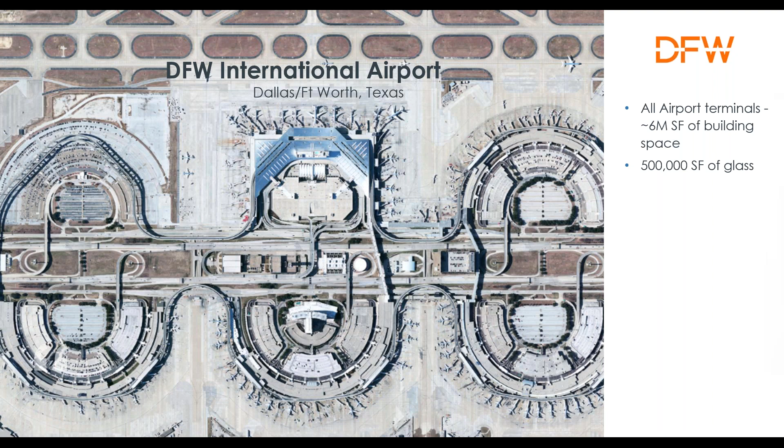And then finally, my last takeaways. Just to wrap up, View Smart Glass is a complete product. There is the coating, the IGU, the physical part of it. Then there is a network, which is the hardware. Then there is the control. The point I'm trying to make is that this cannot be compared with regular traditional glass in terms of performance or cost. You have to look at it in a different way.

This is a transformative, disruptive product. It's in a different league. So it is not just a window. It is almost a device that people can interact with, right? So it's digitizing the skin of the building. And I already talked about this. This is a fit for almost all kinds of building verticals that you can think of. These are actual photographs of buildings that View is on. So you can see this is not just for all floor to ceiling glass. There are different kinds of designs, curved facades, different building verticals, whatnot.

And then finally, my last slide, I want to leave with this: what is the real benefit of this product? I've already spoken about the fact that you need no kind of shading when you have this kind of a product. There is a 100% connection to outdoor views. Smart and connected, I didn't talk about a lot, but that is part of the IoT features that we'll be launching. Comfort, by now it's clear that we are maintaining both thermal and visual. Energy is just a byproduct of that. With its low SHGC, this glass can definitely reduce energy consumption.

And as far as space utilization is concerned, this is just a byproduct of being more comfortable near the glass. This is very, very attractive for developers and other people who want to maximize the rent or maximize the space that they have. They don't want to waste any space. So with a product like this, you're able to put people really close to the glass and maximize the space.

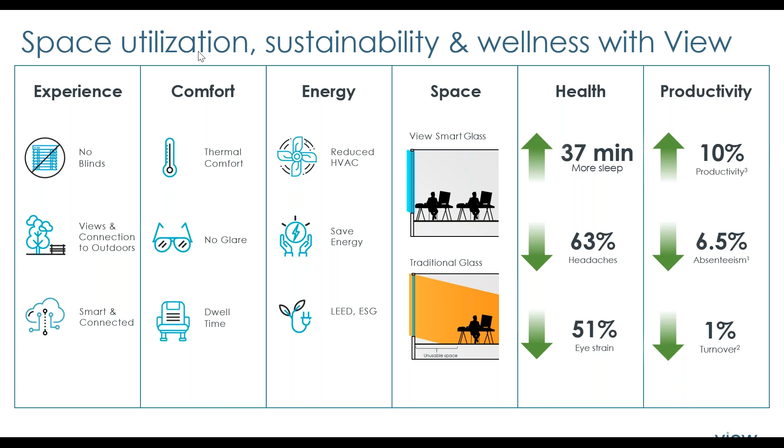That summarizes today's discussion. We'll take just 5 minutes of Q&A. I'll take questions for all of us. So can I have Raghavendran sir and Balaji back on, if you don't mind? Hi, Raghavendran sir, are you there? Yeah. No problem, sir. Till you get your thing sorted, I'll take a few questions for Balaji. Balaji, there's a question for you.

What is the density of high pressure laminate if we use horizontal shades and CNC concept? Will it strengthen the issue? Is there any calculation you suggest? It depends. When we talk about perforated screens, the thickness of the panel will also change as per the perforation levels. The project I showed you in Kerala had almost around 35% perforation, which we could still accommodate with a 6 mm panel. But if the perforations are more, then the thickness will also vary. Normally, the density of the panel is almost 1.45.

Right. And is it possible to use the high pressure laminate waste pieces, cut pieces? Because at site there's wastage. Is it possible to reuse HPL? It is possible. Normally, in many cases we also help the architects or the customers to use it in other places, like gates and interior walls. Even in our own office, whatever waste pieces we got from cutouts, we used as interior hangers. We connected them to a small chain link and used them as hangers. So it is possible.